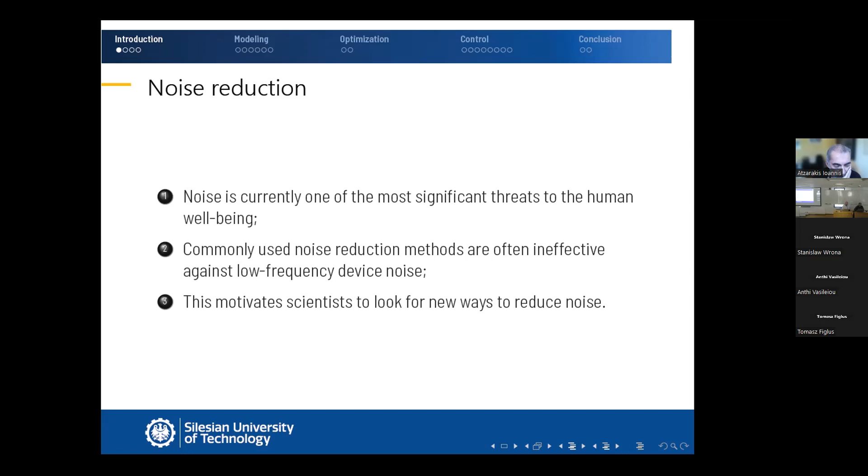One of these ways is to use active methods, which use actuators like speakers and also vibration actuators like exciters to control the environment in order to reduce noise.

Among active methods, we have two main approaches for noise control. One of them is active noise control, which we can also call a classical approach, when we use loudspeakers to generate so-called anti-noise. If we have a source of noise in the environment, we can put a microphone near it, which we'd call the reference microphone.

It gives us information about the noise, and with the loudspeaker, we use it to control the environment and generate anti-noise, using destructive interference to create zones of quiet.

Depending on the frequency of the noise, if the frequency is higher, the zones will be smaller. At some point, it becomes infeasible to make very small zones, like a few centimeters. So there is a limit for which these methods are useful and feasible, like a couple hundred hertz, in order to make a zone of quiet of half a meter to a meter in diameter.

Moreover, with this classical ANC approach, in three-dimensional spaces it's difficult to make and maintain these zones of quiet.

If there would be changes in the noise source, if the noise source would move, it would be difficult to maintain the zone of quiet in one place. It also could be difficult to add many loudspeakers in order to control the environment.

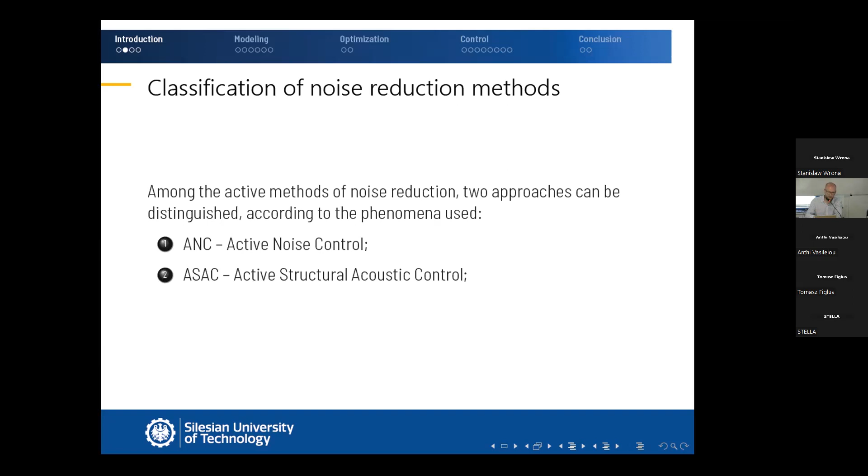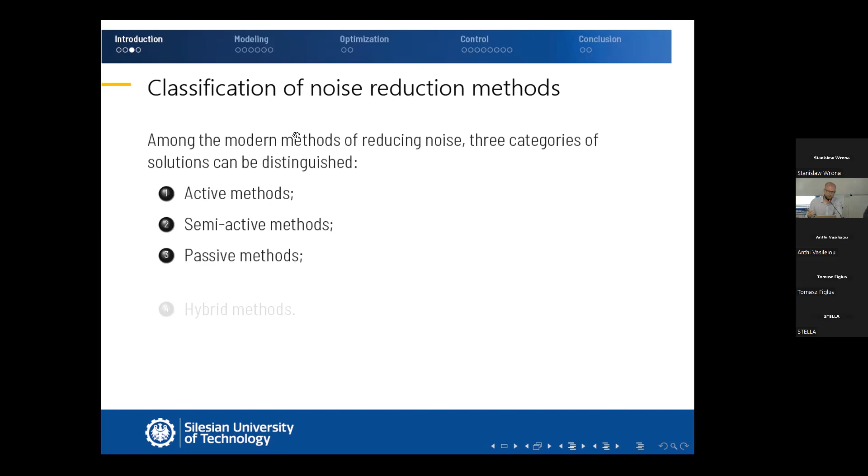Moreover, I would like to mention that active methods is something we started our adventure with in noise controlling earlier, but active methods themselves can be supported also by other methods distinguished by the energy point of view, how they use the energy and where the energy comes from. So with active methods, we need to introduce energy to the system.

And this leads also to some difficulties, like we need to make sure the system is stable, because if we introduce new energy to the system, we need to take care about the convergence of the control system in order to make it stable and to reduce noise. But the performance provided by active methods offers the highest possible noise reduction. It can, in many applications, exceed 20 decibels.

In case of applying active methods to such a device casing, we control vibrations of the casing in such a way as to reduce the sound radiation to the surrounding environment.

And what I think can be surprising is that when this system is operating and the noise is reduced, it doesn't mean the vibrations have to be reduced. The vibration distribution is altered, it's different, but the amplitude can be even higher. The first time I noticed it, I thought there was some mistake, but we repeated these experiments many times, and most often the amplitude of vibration is higher, but the distribution is different.

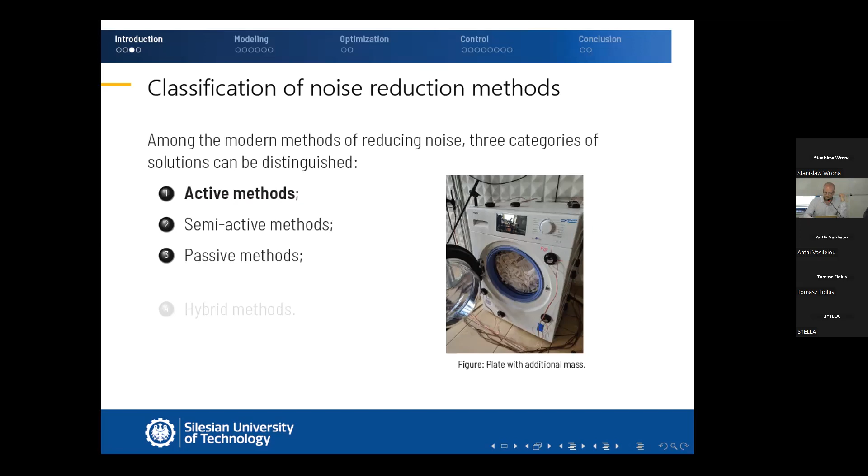Another approach that we used in order to either support the active methods or use as a separate solution is semi-active methods. In this case, we try to alter the properties of the barrier, because each barrier made of metal sheets like here, which the casings are made of, will have some natural frequencies.

At which the noise reduction will be poorer. So we thought that if we can manipulate these natural frequencies in real time, then we can try to adapt to the current noise spectrum, assuming it's not broadband and covering the whole spectrum. If there are only some single or tonal frequencies of the noise, then we can adapt the properties of the barrier.

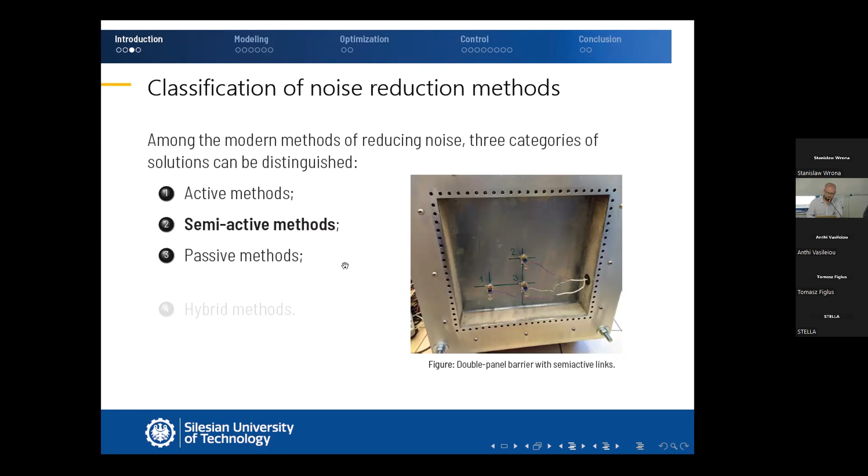And finally, the passive methods, which might seem pretty simple, but such modification to our barrier, if we know a priori what the noise spectrum will be, can also help us adapt the properties of any barrier. What we've done in our research is, by modeling the barrier, we can predict where to add a particular mass in order to move the frequencies, but not in a semi-active way, in a passive way. So by adding appropriate mass at a specific location, which follows from the optimization algorithm and the model of the barrier, we can shape the frequency characteristic of the barrier and enhance the transmission loss at any frequency band we would like, depending on the noise spectrum.

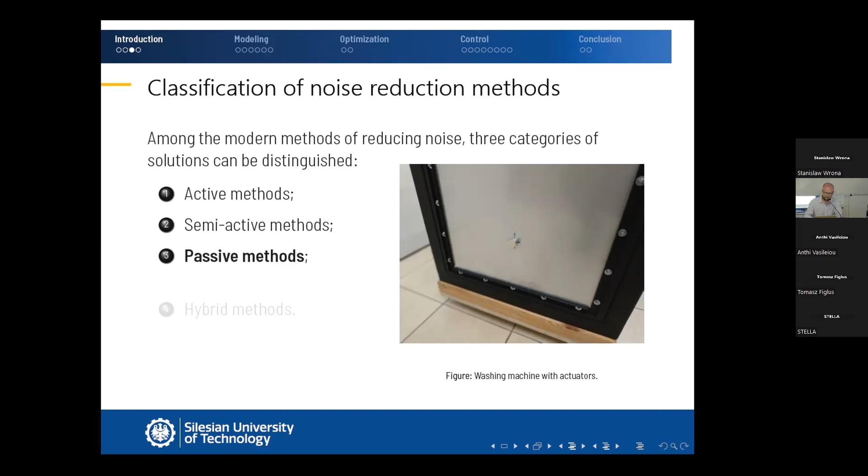So if we know what the noise spectrum will be, we can benefit from both strategies. The first one, active approach, is most comprehensive, obviously, but it's also most energy consuming and the cost is highest. But if you would like to reduce the energy consumption, in case of semi-active, use the energy only to switch the states, or in case of passive methods, without any energy, we can also achieve, I believe, pretty attractive noise reduction levels, reaching even 10 decibels for real devices like a compressor and so on, when we know what the frequencies should be and when the frequencies are tonal.

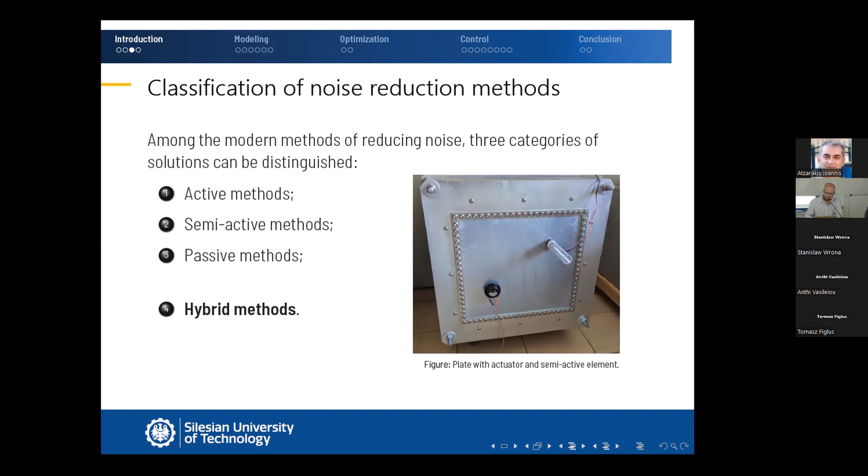And finally, the fourth approach would be to use more than one of these approaches together. We've done research with one of the semi-active components in order to change the properties of the barrier together with the actuator. The semi-active component's purpose was to adapt the properties of the barrier in order to enhance the controllability of this actuator, making this actuator more efficient. I will show specific results in the second part of this lecture, but I believe this introduction gives an overview of the methods that can be used for these noise control issues.

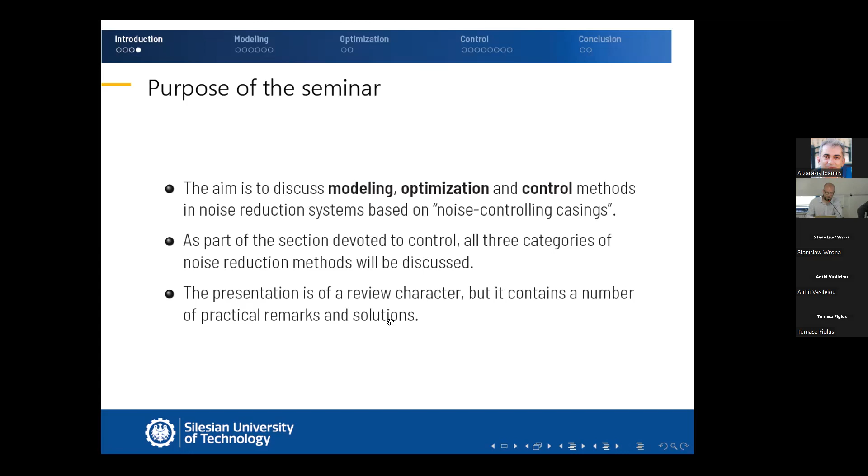So the purpose of this seminar is to discuss the modeling, optimization, and control methods in noise reduction systems. As a part which is devoted to control, all of these three categories, active, semi-active, and passive, some examples will be shown. This presentation has a review character showing different solutions, but it also contains a number of practical remarks that I believe can be interesting to researchers and practitioners.

In this section of modeling, I will briefly explain what models we've used to model the barrier, but we don't get into the equations because I believe it's not necessary in this presentation. I will just show what the models are used for and what the benefits of using this model are. So first of all, what is the purpose?

The modeling of vibroacoustic systems is crucial for their optimization. If we have a proper accurate model, then we can optimize many of the barrier parameters, making it much more efficient. The optimization can lead directly to noise reduction by finding optimal configuration of passive elements. As I just showed, putting a mass even on a magnet can drastically change the characteristic of the barrier, and therefore it can enhance the noise reduction. On the other hand, the optimization can find favorable locations of actuators and sensors for the active noise control system, and therefore it can also benefit the noise reduction.

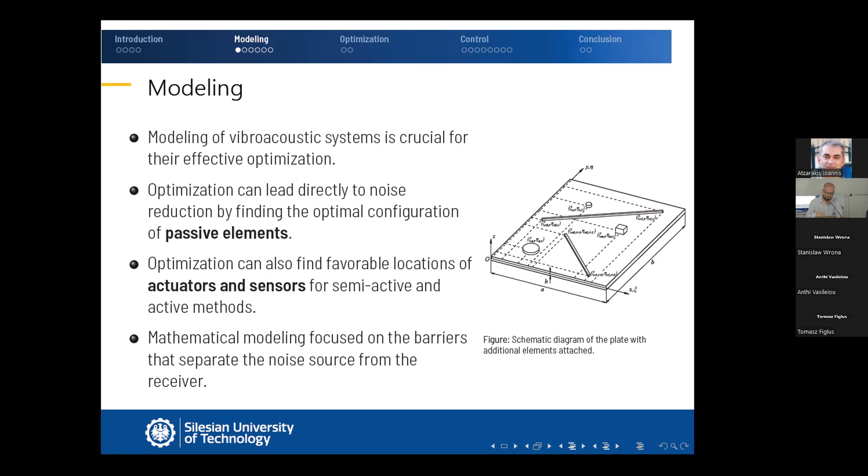The mathematical modeling was focused on barriers that separate the noise source from the receiver, either for plain barriers or whole casings, whole boxes. Firstly, the modeling was developed for plates, rectangular plates. The model described the vibrations of plates with elastic boundary conditions, with concentrated masses and stiffeners used to passively modify the properties of the barrier. The model allowed us to predict natural frequencies and vibration modes, which is also important because the vibration modes, the distribution of the vibration, is crucial for calculating the radiation efficiency, noise radiation. And knowing that, we can also benefit, which I will show in the next slide.

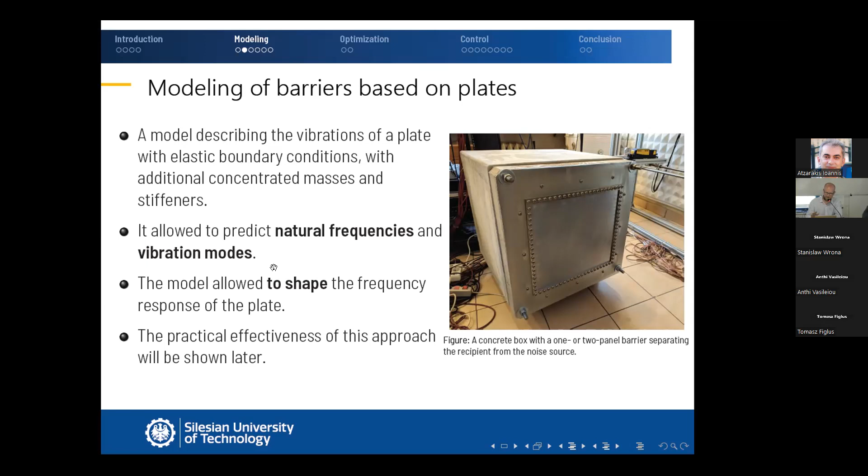The practical effectiveness of this approach of optimizing frequency characteristics is shown in the later part devoted to control. True capabilities of this method of shaping the frequency characteristics of the barrier were revealed after extension of the model with the phenomenon of acoustic radiation.

When we were able to modify or shift the natural frequencies, this was beneficial, but it was even more practical when we could model the acoustic radiation and modify the mode shapes, the vibration distribution, in such a way to reduce the radiation efficiency.

The purpose of the acoustic barrier is to reduce noise, and the vibration amplitude is actually not important. So we allowed certain modes to vibrate as long as they don't radiate any important noise component. It became possible to shape the distribution of vibrations to reduce the coupling with the acoustic medium. This effect was doubly beneficial if the noise source stimulated the barrier purely acoustically.

Because if this barrier was excited by a sound wave, it was more difficult for the sound wave to excite the barrier at these particular frequencies, as well as for this barrier, once already excited, to pass the vibration further with radiation to the environment where the recipient is.

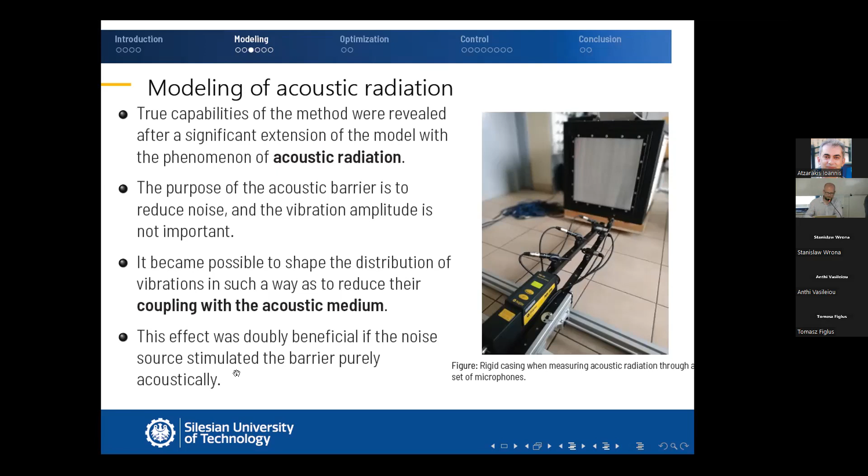We've also used the model to optimize the location of sensors and actuators. What we noticed in the case of optimizing actuators—maybe I'll add one more introduction—is that initially we tried to optimize the actuators to control every mode of a casing or barrier, but this was not really the optimal approach, because we noticed that only half or less than half of the modes really contribute to sound transmission or radiation.

So in the case of optimizing sensors and actuators, being able to model and predict the acoustic radiation, we could focus the optimization only on those modes that contribute to noise radiation and transmission. This led to significant improvement in energy efficiency for only these acoustically significant modes.

To give a tangible example: when optimizing 3 actuators on a plate, including the acoustic radiation in the model and focusing on the acoustically significant modes gave the same controllability boost as adding an extra actuator.

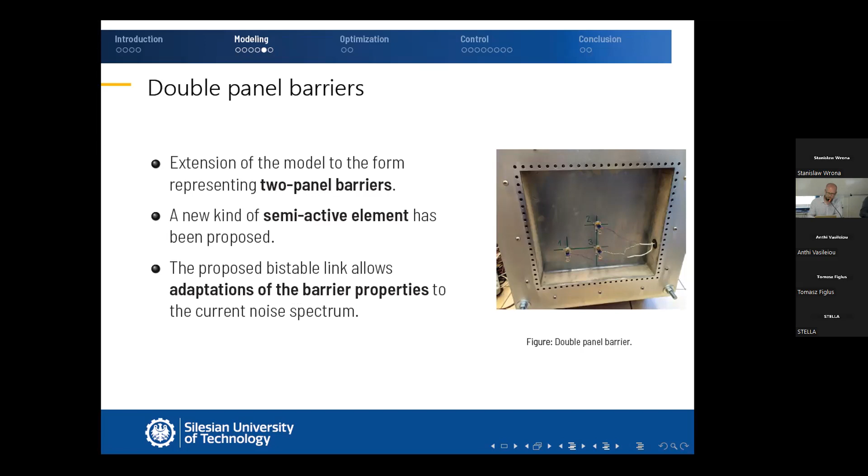Finally, finishing the part related to modeling, together with the Universitat Politècnica de València, we also implemented this approach for rooms, in order to optimize the locations of microphones and speakers to generate zones of quiet. This approach is the classical ANC approach that I mentioned at the beginning.

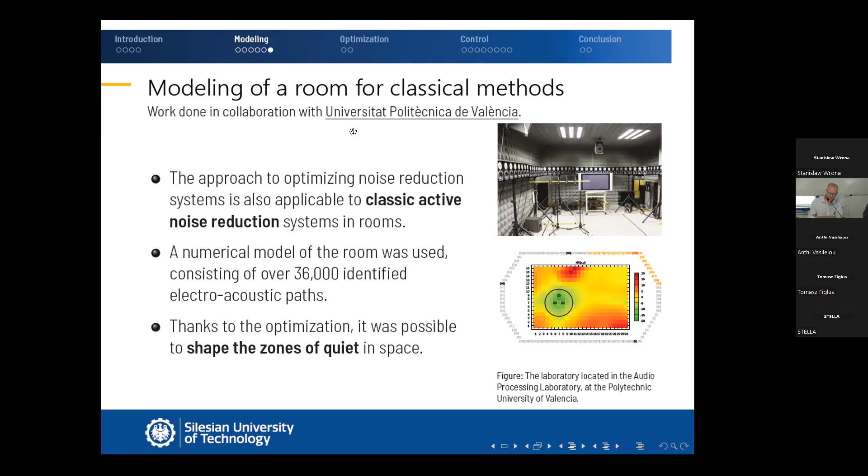So if you would like to optimize the shape and distribution of these zones of quiet, we can also use this similar optimization approach. Although the research we are doing focuses on the ASAC approach, structural noise reduction, it can also be successfully applied to this classical ANC research.

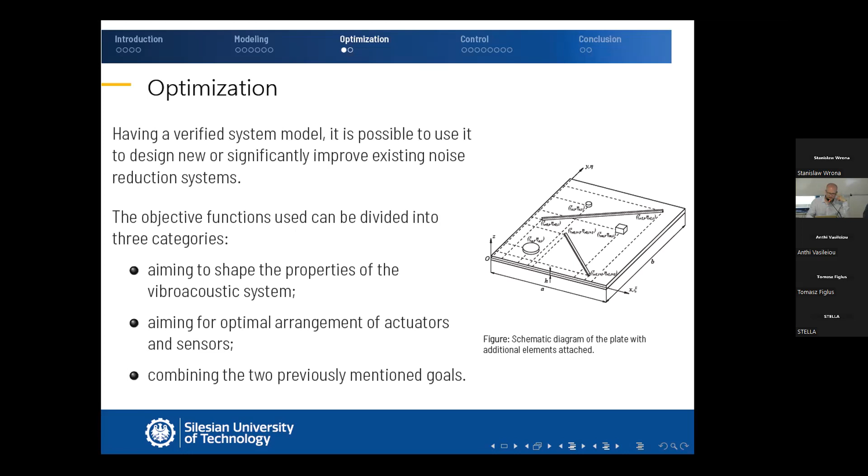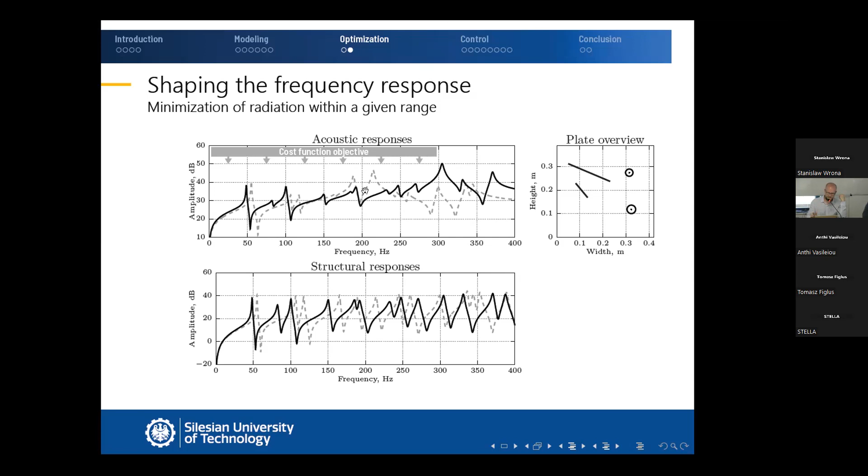So just by adding passive components, we can reduce the acoustic response and therefore increase the transmission loss for such barriers at these resonances by approximately 10 decibels. I believe it's pretty beneficial, assuming the noise source can excite these particular frequencies. If you want a universal barrier for the whole frequency range, these modifications can make the barrier a more efficient noise barrier. In terms of structural response and vibration, not much changed, but in terms of acoustic response, the difference is clearly visible.

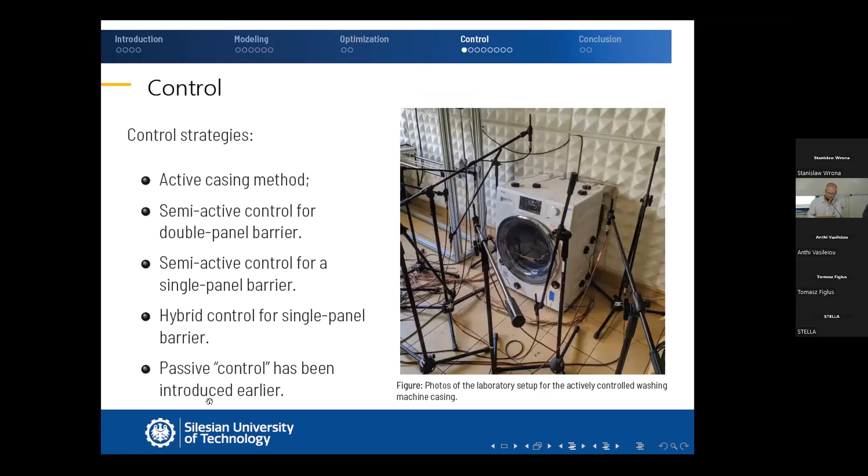Okay, and now the final part, the control results. Firstly, I will show the results for the active casing method, and then follow with the results obtained for semi-active solutions, and mention the hybrid solution. What we call passive control, because there's no real control system, is this modification shown here. So we can say that this was introduced here, and now we focus on active and semi-active control.

These frequencies are harmonic frequencies of the rotational velocity of the drum. This low frequency range is clearly sensible by humans, so this reduction in low frequency noise is also most difficult to address with passive methods.

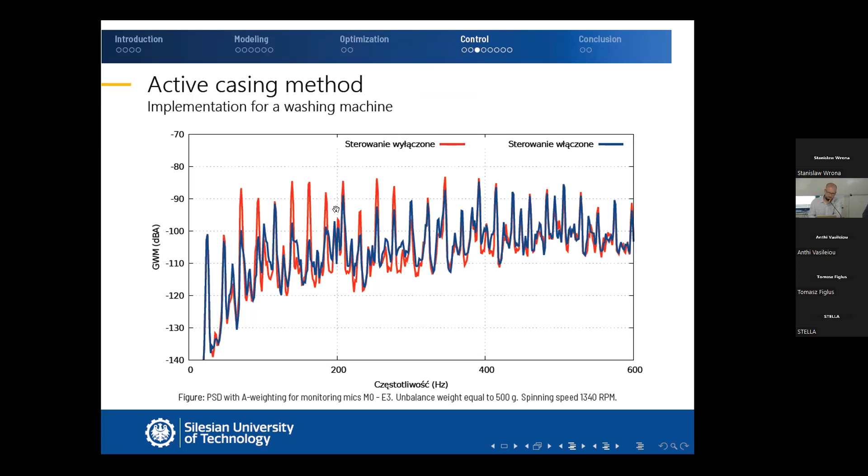We're trying to push this limit forward, maybe to 500 Hertz, but we still need to fill the gap between the active control band, where it is efficient, and the band where some passive thin sound-absorbing materials, like a layer of felt, are also efficient, which starts from approximately 1 kilohertz. So this frequency band between approximately 300, maybe 500 Hertz, up to 1 kilohertz, still needs to be treated. But with this approach, we can very efficiently reduce the lowest frequencies, which are also most difficult to treat with passive methods.

Now passing to the semi-active control approach. Now I will show the results that can be obtained for these bistable links, and this research was done together with Hong Kong Polytechnic University with Professor Li Cheng.

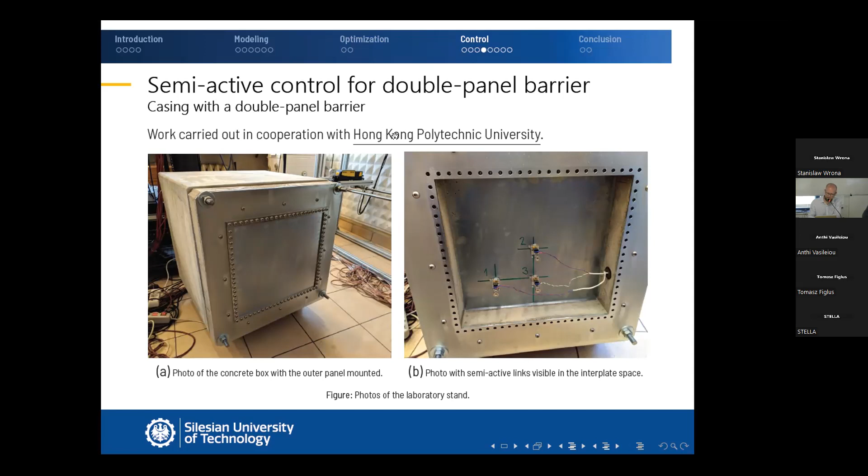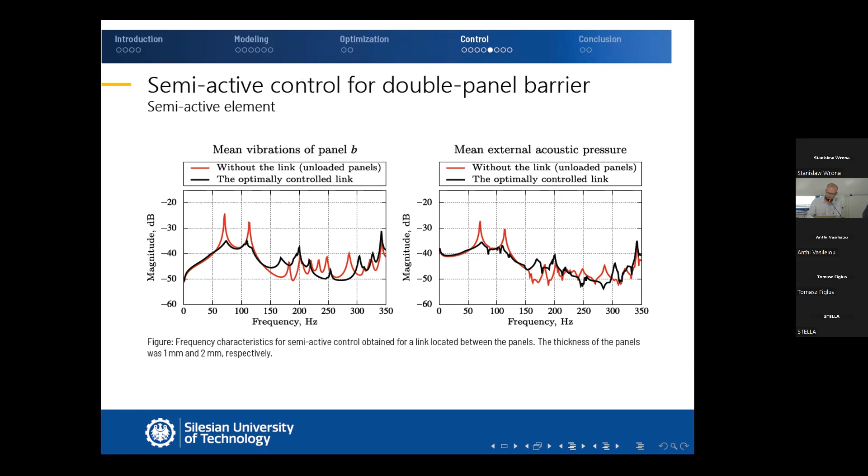And the benefit from this approach can exceed even 15 decibels. I also believe that it is a quite attractive solution, especially since these double panel barriers are commonly met in many different applications and environments - like even the airplane fuselage, which is also a double panel structure, or in buildings, where we have double panel walls between rooms and so on. So we can adapt this solution to many different applications.

After this research, we also wanted to develop a semi-active actuator dedicated to single panels, because these links proved to be efficient for double panels. But how to modify to such extent the properties of a single panel, where we assume that we don't want to find a support or any supporting structure to connect it to something. We wanted to put an actuator on a single panel without any extra mechanical support.

So we designed our own actuators with movable mass, which modifies the mass moment of inertia, and therefore would modify the modal mass of the vibrating modes. So if we put this actuator on a plate surface which rotates, let's say along a nodal line, there would be no movement, no translation, change of the position, but just the rotation.

If we place this actuator at such a line, by moving the mass we would change the modal mass, because if it would be lower, closer to the surface, it would be easier to vibrate, to rotate this actuator. If moved by this motor and a screw, and the mass would be moved further from the surface of the plate, the moment of inertia would be greater, and respectively the modal mass of this particular mode would also be greater, and the frequency of this mode would be altered.

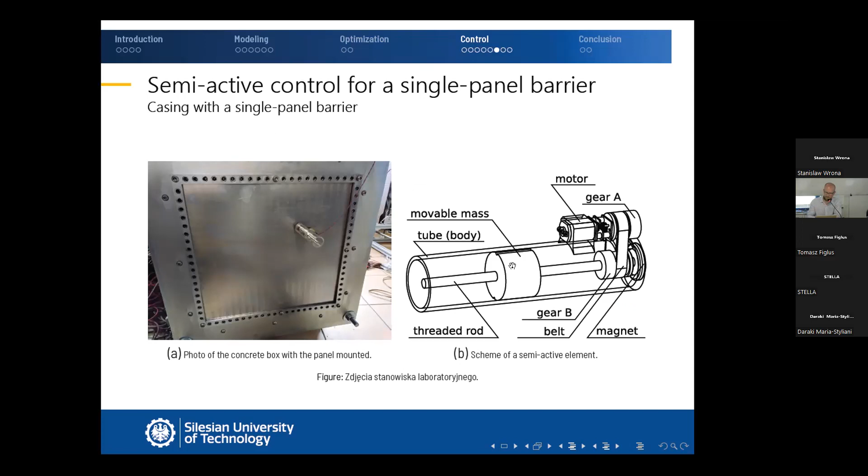So assuming that we will have a noise of a single tone, we can always pick the most beneficial out of these 10 characteristics, which means the most beneficial position of this mass, and therefore avoid excitation of any of these modes. So in case of narrowband noise, it allows us to eliminate basically all of these resonance peaks.

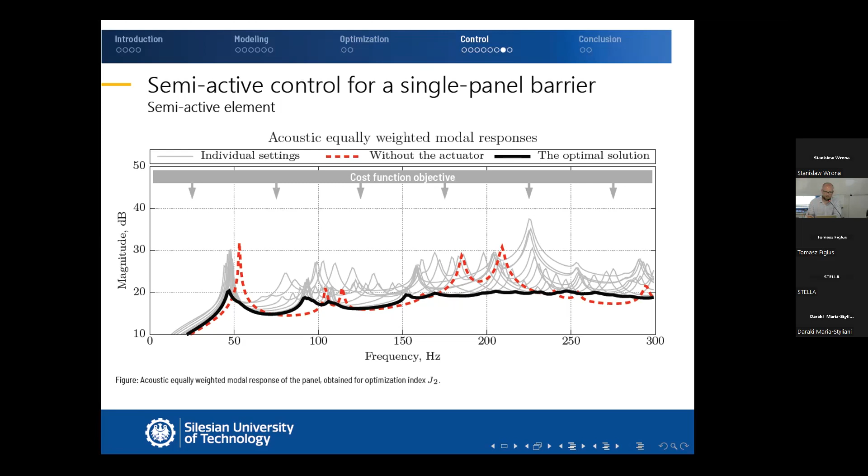So it can be used for both single panels, but actually it can also be attached to one of the plates of the double panel barrier.

And finally, we also applied these two components together. Here, I still don't have the frequency characteristics to show you, but I will explain what the concept is. So in such a case, when we employ both of these actuators, we can distinguish two operating modes.

The only semi-active mode works, as I previously explained, just by moving this mass and choosing the most beneficial frequency characteristic. There's also an active mode with semi-active support. This means we will adjust the location of this mass in such a way as to most benefit the controllability of this actuator.

Normally, we would not be able to control all of the modes, or at least not even the initial 10 modes of the plate with a single actuator. Why? Because if we add the actuator at any location of the plate, these modes rearrange in such a way that the second or third mode of this plate would always have a nodal line going through this extra concentrated mass. It always happens like that. So with single actuators, normally it would not be possible to control the initial 6 or initial 10 frequencies. Some of them would always be uncontrollable, and therefore the noise would pass through as with a passive barrier.

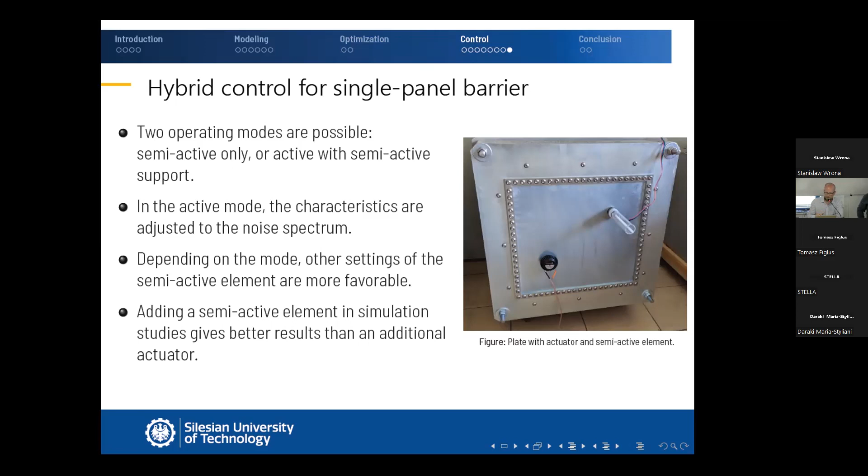But by adding this semi-active component, we can modify this frequency characteristic in such a way that even with a single actuator, we can always control each of the modes. Obviously, these two locations have to be optimized, because an accidental location will not guarantee that we could control all of them. But we showed that with only one actuator and one semi-active component, we can pick such two locations that allow us to control the initial, I believe it was 10 or 12 modes.

So to conclude this talk, the noise reduction methods can be applied to device casings, and they have a high potential to support or replace classic sound absorbing materials, which have their disadvantages that I mentioned earlier. Depending on the availability of external energy, it's possible to choose between active, semi-active, or completely passive solutions. In the low frequency band, active methods can offer more than 10 decibels of reduction, in some applications even more than 20 decibels.

And assuming stationary or non-stationary but narrowband noise, the presented passive and semi-active solutions can also offer more than 10 decibels of reduction. Thank you very much for your attention.

Well, thank you very much, Professor Wrona. The topic is very interesting, and as we speak, actually, in this room we have a permanent source of noise, which you may help us reduce at some point anyway. So, time for questions. We have the wireless microphone. Okay.